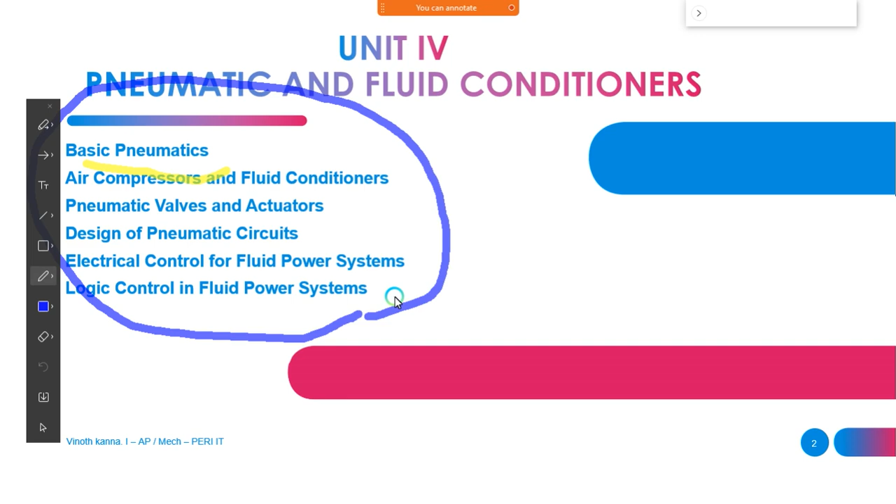In this, what are the important topics in unit number 4? These are all the important topics. The very first one, properties of air, which is an important one. The next one is perfect gas laws, followed by compressor, FRL unit, muffler. Next is air control valves, quick exhaust valves, and pneumatic actuator.

The cascade method is very important. Already we discussed this in other contexts, but even here we are going to discuss some important topics. Followed by the cascade method, we have fluidics, and finally ladder diagram and pneumatic logic circuits, which include AND, OR, NAND and NOR gates.

So wherever I'm putting an underline, like properties of air, perfect gas laws, and fluidics - these three chapters have the maximum possibility of being asked, about 2 marks questions, not more than that. So if you want to prepare for 2 marks questions, just concentrate on properties of air, perfect gas laws and fluidics.

Properties of air - already we studied properties of hydraulics and hydraulic fluids. The same properties will come here but with little changes. For perfect gas laws, we also discussed this in hydraulics, with applicable small changes we go with pneumatics. And finally we go with fluidics.

Fluidics is also one of the important topics in Part A. The rest of the topics are Part B questions. The cascade method is very essential - they will ask it for Part C also.

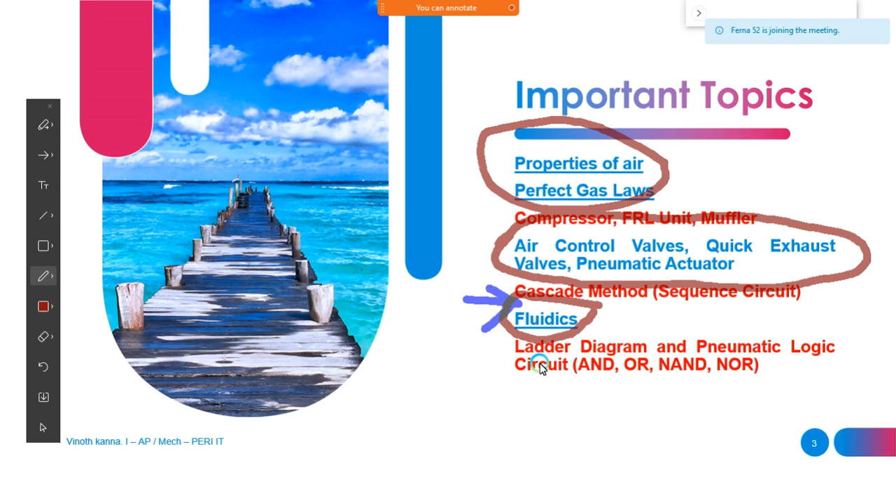So now what we are going to concentrate on now is compressor, FRL, muffler, and the cascade method. This is very important in terms of Part B as well as Part C. And finally we are going to discuss ladder diagrams and pneumatic logic circuits. So one by one we are going to see it from the exam point of view.

The maximum possible question is about the composition of air, which we already know from lower classes. Air consists of 78% nitrogen, 21% oxygen, and 1% other gases. This question has come up 2 or 3 times in the previous 5 years' papers, so remember 78% nitrogen.

In normal air, nitrogen is present in enormous quantity, and oxygen around 21%, which is more essential for our health. Finally we get some other gases including helium, neon, and maybe water vapor. So all these gases are available.

These are the two important questions in properties of air. Followed by pressure relationship, one question will definitely come from this. You have to remember: absolute pressure is equal to gauge pressure plus atmospheric pressure. This is very important, not just for the exam, but if you go for any government exam, they will definitely ask this question.

Atmospheric pressure is nothing but the air surrounding our body, the normal pressure available at Earth's surface. The standard atmospheric pressure value is 1.013 bar. So absolute pressure is the addition of gauge pressure plus atmospheric pressure.

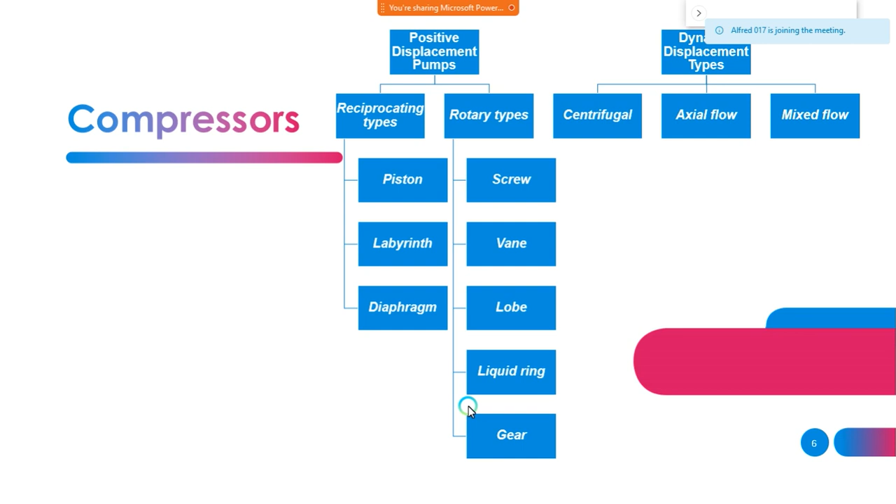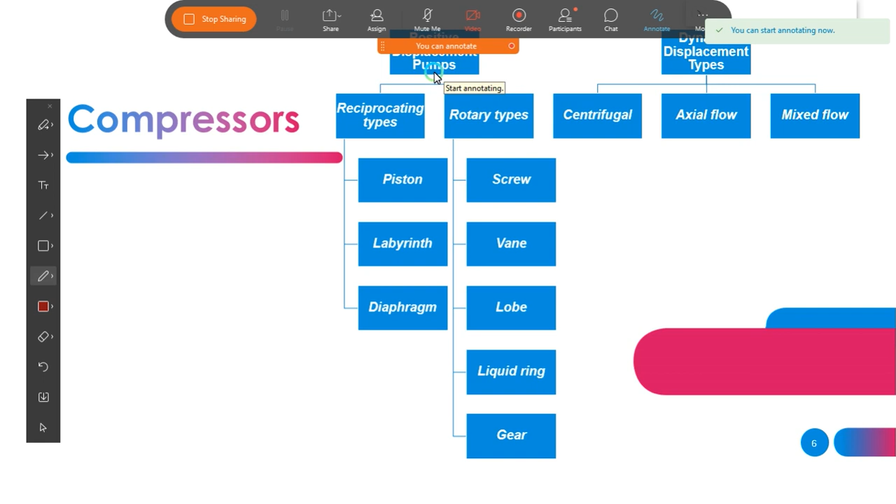For compressors, don't worry, we have n number of types. Don't worry about that. In the chapter, under positive displacement, we have reciprocating and rotary, two types. In reciprocating we have only the piston compressor, whereas in rotary type we have only two, that is screw compressor and vane compressor, not more than that.

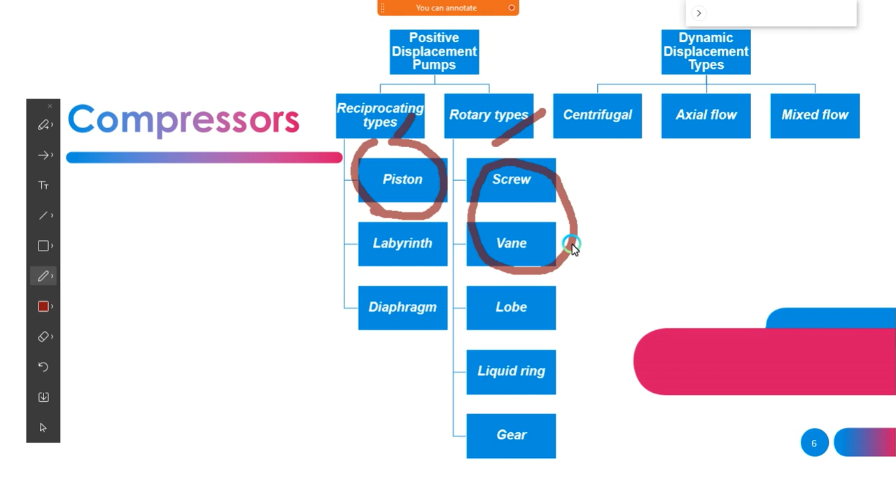In the examination, first you have to write what is a compressor. Atmospheric air is sucked by the compressor, which is used to increase the pressure and temperature level at the output of the compressor. Then you have to explain which type it comes under. For example, if they ask to explain the concept of piston compressor, first write what is a compressor, what is a positive displacement compressor, then reciprocating compressor, in which you explain the piston compressor.

In our syllabus we have only these three. In the compressor they will ask only piston compressor, screw compressor, vane compressor. Out of this, definitely one question will come, but it is not compulsory. In the 4th unit, compressor is a possible Part B question. Suppose in unit number 2 they ask screw pump or vane pump, then definitely they won't ask screw or vane compressor in the 4th unit.

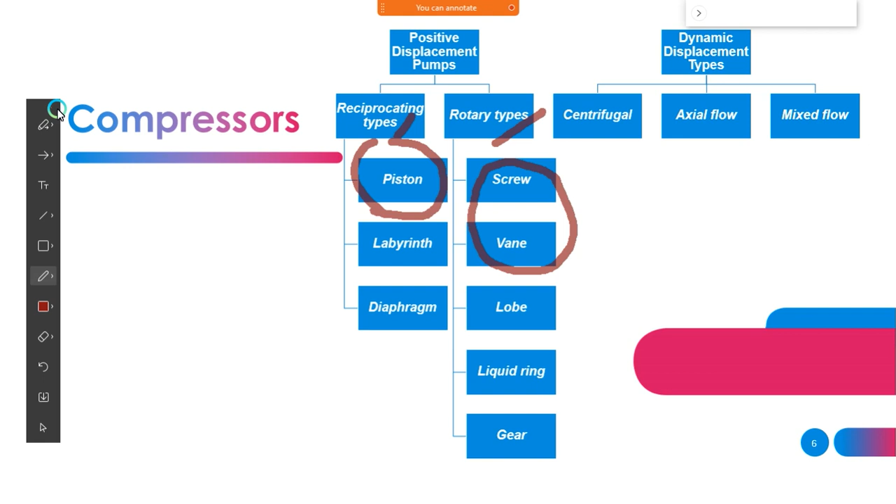So even to study the compressor, just replace it; the diagram and everything is similar to unit number 2. So better go with that, it is quite easy. This is one of the important topics in the 4th unit. Next, you should compulsorily study the FRL unit and muffler. This is very essential. They may not ask 13 marks; they will ask a 6 or 7 marks question.

The FRL unit you know well: filter, regulator, and lubricator. You know the function of the filter, the regulator, and the lubricator. We have some diagrams. We have already studied this in the classroom, and some assignments were submitted also. So study what is the FRL unit, its construction, and the neat diagram. Followed by that we have the muffler.

The muffler is a very essential part of unit number 4. Even though it looks similar to the pump, the muffler is somewhat different. What you study new here is the FRL unit and muffler, so study them first while preparing unit number 4. The muffler and FRL unit both have diagrams. As I said, draw the diagram on a single page neatly using scale and pencil. It is easy to get good marks that way.

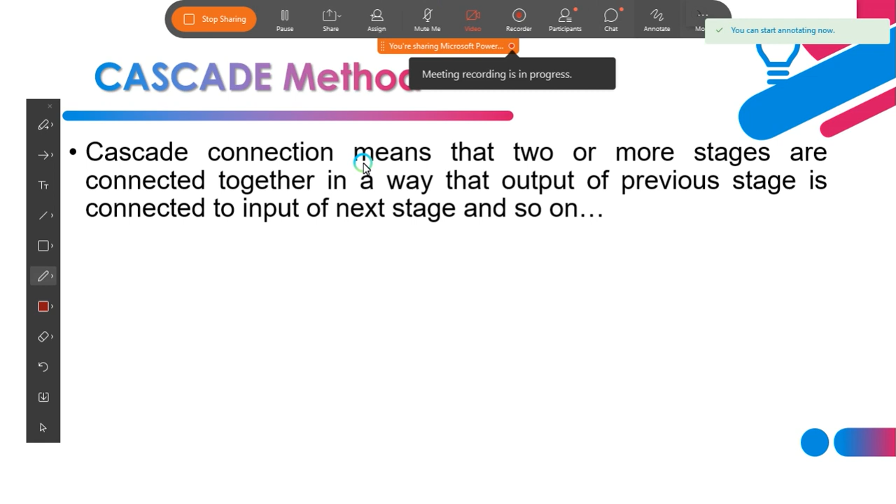Another one from either the fourth unit or fifth unit, because only these two units are application oriented. Suppose they ask from the fourth unit, then definitely the question is from cascade method. So cascade method is very important. We already discussed what cascade method is, so here I am going to recall it for you. So what is cascade method?

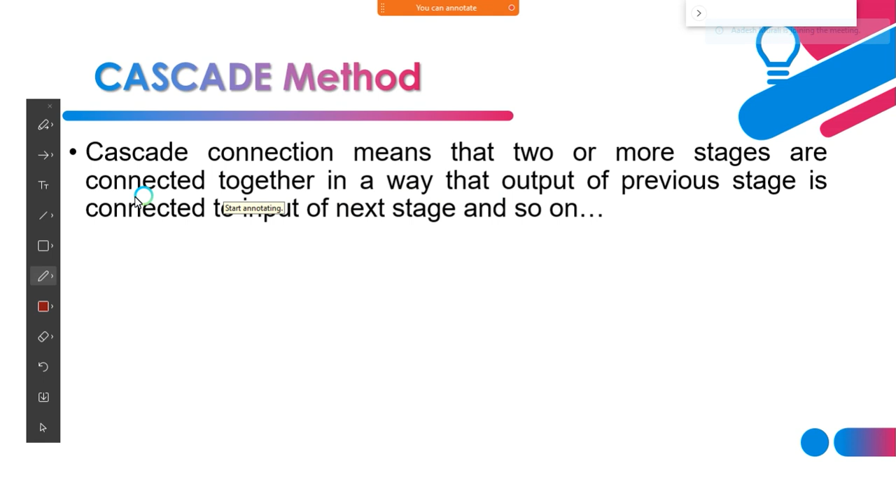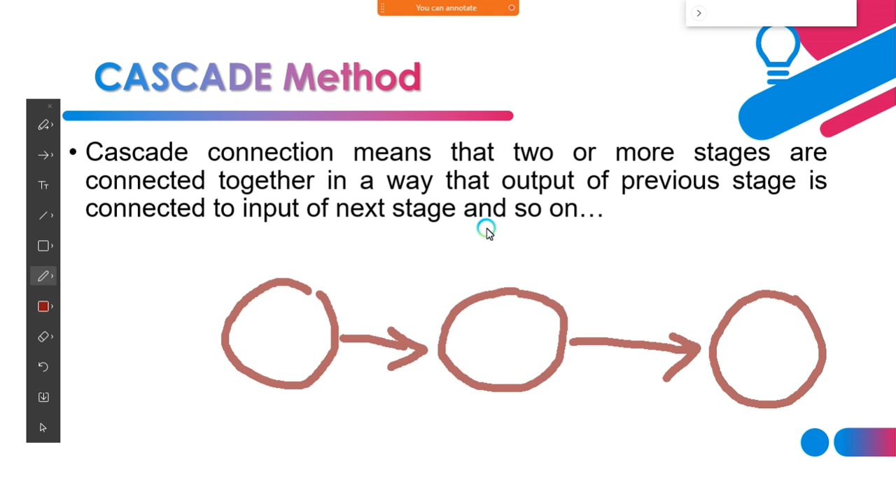The definition: two or more stages are connected together in a way that the output of a previous stage is connected to the input of the next stage. So you develop a system as a combination of groups. Say 3 groups will be there. Output of the first group will be the input of the second group, and the output of the second group will be the input of the third group. Such a system is called a cascade system: two or more stages combined together in order to get the proper output.

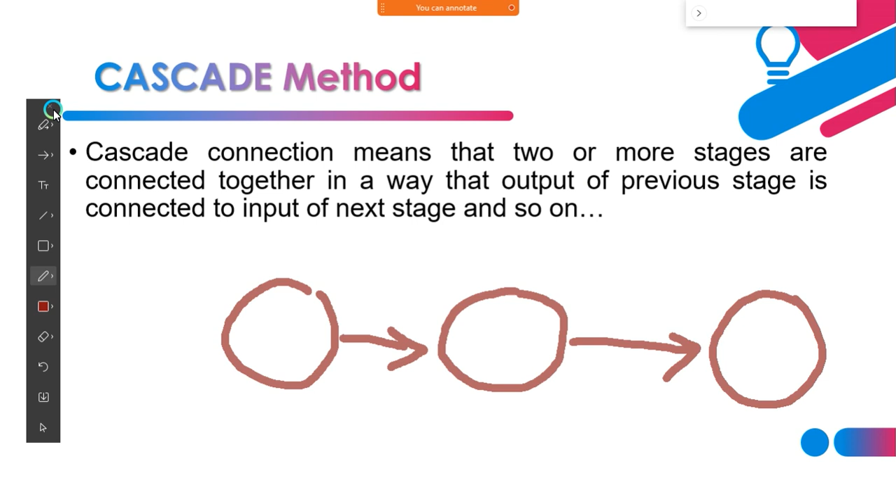So now we go with the procedure. They will give a design question; you have to design the entire circuit. Here we have only 5 steps. If you know these 5 steps, it will be very easy. No need to go to the textbook, just follow what I am telling. The very first step: you have to put a name for each cylinder.

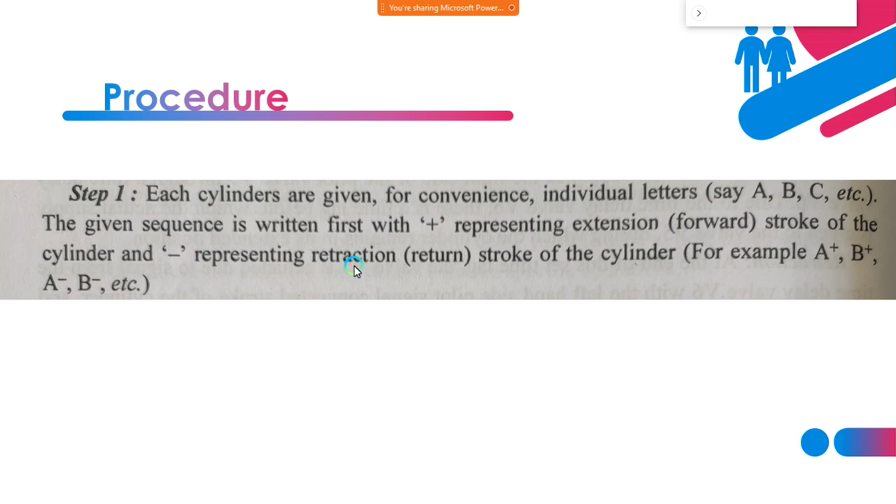For example, if the system includes 3 cylinders, then you have to name them A, B, C. The alphabetic letters A, B, C denote the cylinder names; each letter stands for a cylinder. Then we put an extra positive or negative sign. The positive sign indicates the forward stroke, the negative sign indicates the return stroke. So in the first step we define the name of each cylinder and its position, either forward stroke or return stroke.

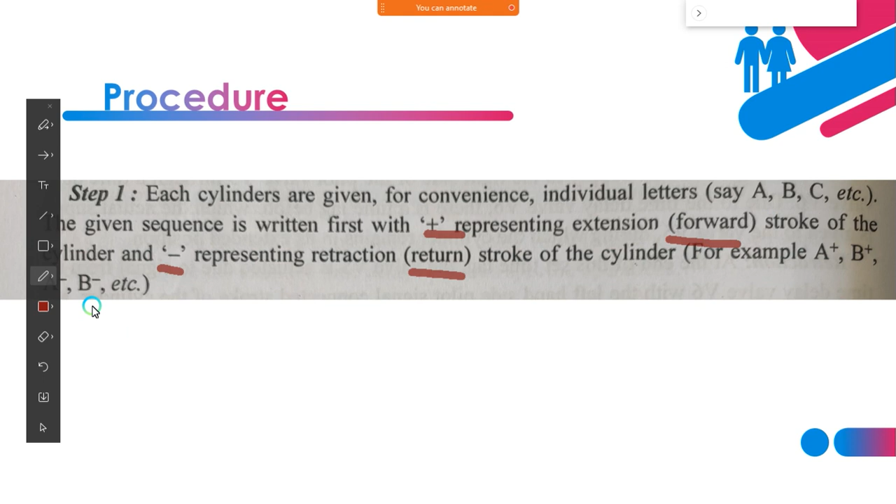But the question itself will give step 1. The question contains the first step, like A positive, B positive, A minus, B minus. So no need to worry about the first step. Then we go straight to the second step. After reading the question, you have to do the grouping yourself. Once you do the grouping correctly, the answer will be correct. So how will you group?

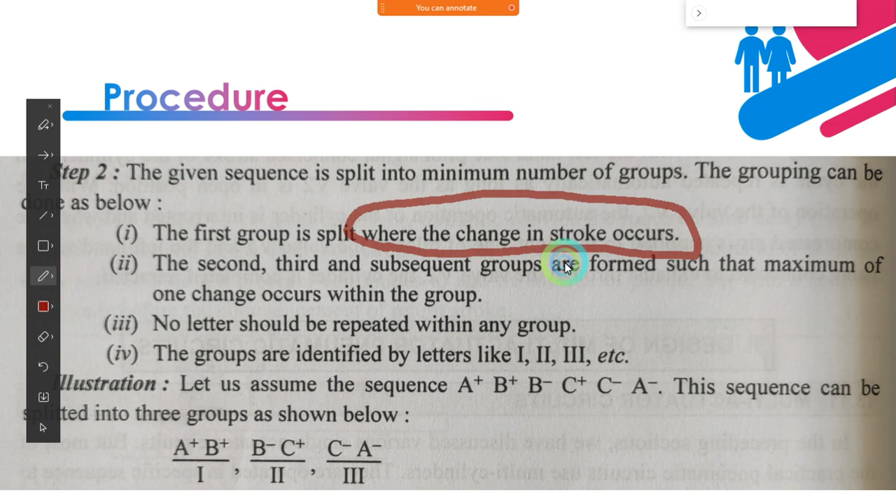Very first, you group where the changes in strokes occur. The first group will be where exactly the changes occur. Second, third and subsequent groups will have a maximum of one change, not 2 or 3 changes. Maximum one change, minimum one change, which means each group must contain at least one change. That is essential. The first group may have any number of changes, while subsequent groups have a maximum of one change, either forward stroke or reverse stroke.

If that is called changes, you need to go for changes. And then in the group itself, no letters should be repeated. For example, if you take ABC as a cylinder, in which already you put A positive in one group, B positive in the same group, you should not repeat again the term A or B. So I have a group like A positive and B positive. This is one group I have.

So if I think, okay, why can't I put A minus here? The letters are repeating, so you should not add it in the same group. It will come as a separate group. That is the meaning of it. So no letters should be repeated. And the fourth and final condition: the groups are identified by Roman numerals like 1, 2, 3. So for example, here we have group 1, 2, 3. So 3 groups we have.

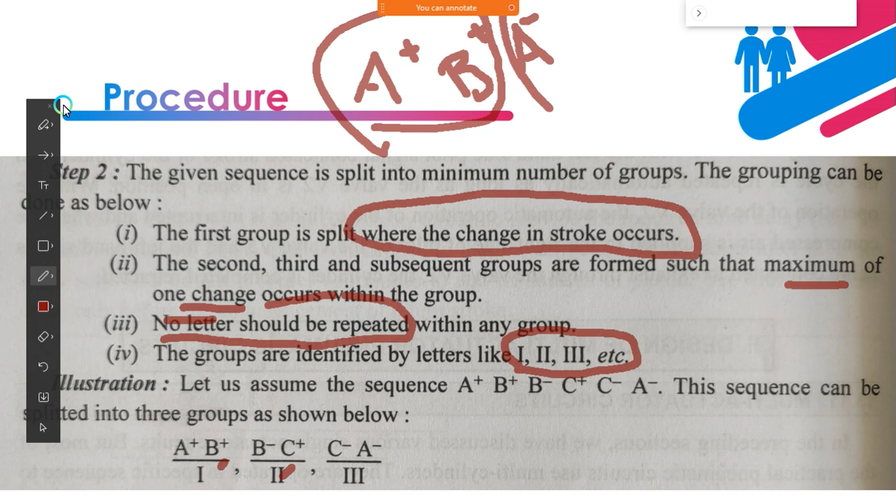So for each group, we may take the first group as A plus, B plus. You may add C plus or C minus, no issue, but you should not add a value containing A or B, because already we have A and B in group 1. So you should not add A negative here. So A positive, B positive, then C minus or C plus is quite good. But you should not repeat a letter which is already present. So this is the grouping. Grouping is very essential. Once you've done the grouping, the problem will be very easy.

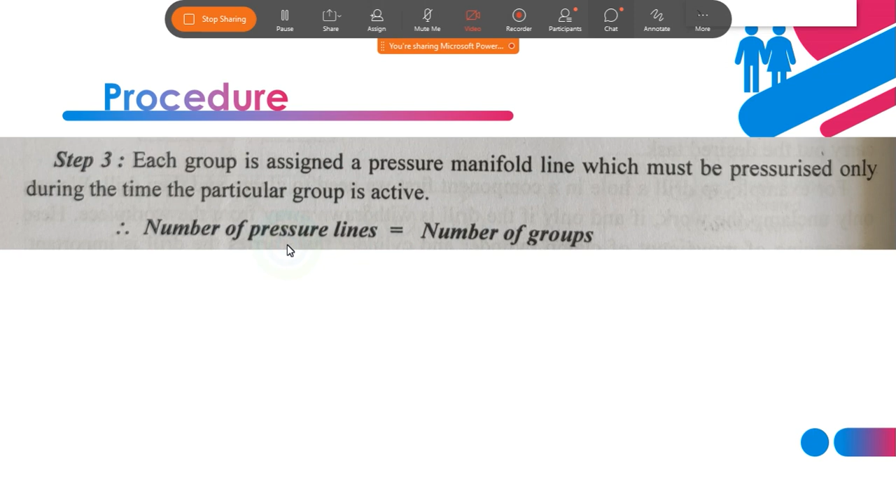The third step is you have to go with the supply lines. Here they indicate pressure lines, which are nothing but supply lines. We need a supply for each cylinder. Either pneumatic or hydraulic, we are going to supply the fluids in order to actuate the cylinder, for which we need a supply line. How will you identify the supply? However many groups we have, the same number of supply lines we have.

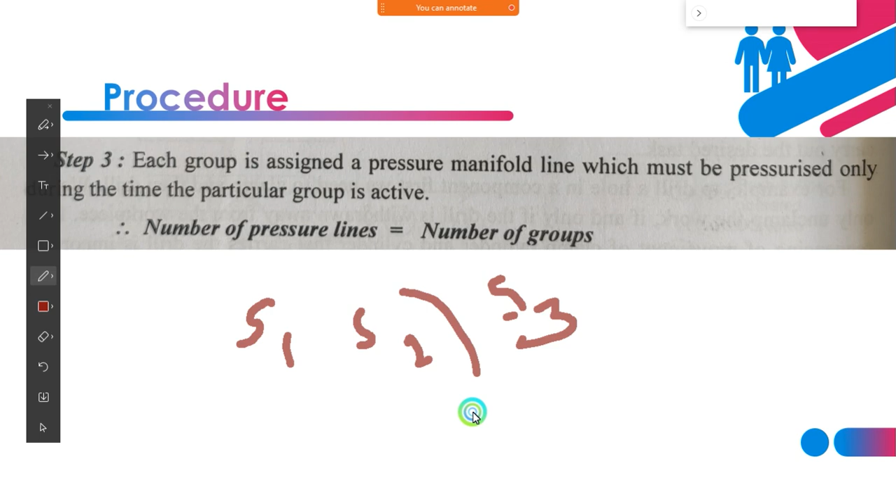Suppose we have 3 groups, we go with 3 supply lines. So simply we make it S1, S2, S3. S1 indicates supply line 1, S2 supply line 2 and S3 supply line 3. So if you have 3 groups, then you go with 3 supply lines. 2 groups, then you go with 2 supply lines. Okay, then go with step 4.

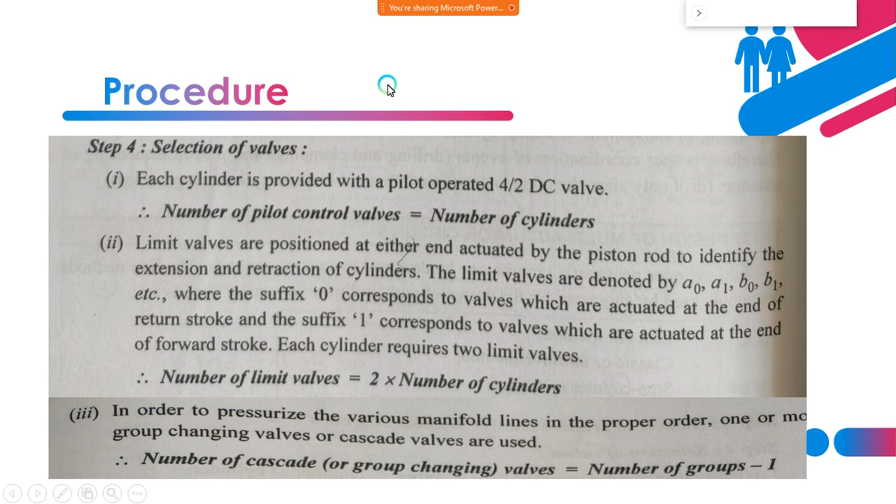In step 4 you have to go with the valves. Each cylinder has one valve. So the number of pilot control valves, the direction control valves, is equal to the number of cylinders. However many cylinders we have, the same number of direction control valves we need. And we have the limit switches.

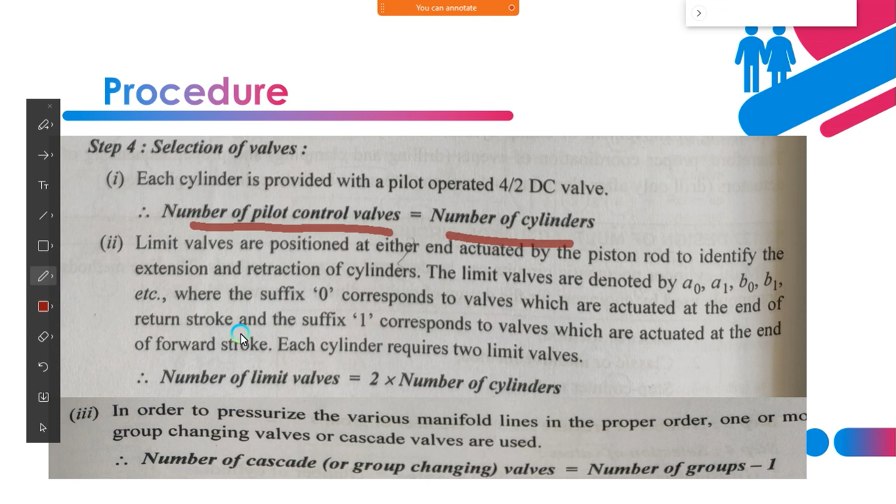The limit switch tells whether the piston is reaching the forward stroke extreme position or the reverse stroke extreme position. For the forward stroke we have one limit switch, for the reverse stroke we have another limit switch. So each cylinder has 2 limit switches. The number of limit switches is equal to 2 times the number of cylinders. Suppose we go with 2 cylinders, A and B, we need 4 limit switches. If you have 3 cylinders, then 6 limit switches. Like this you go with designing.

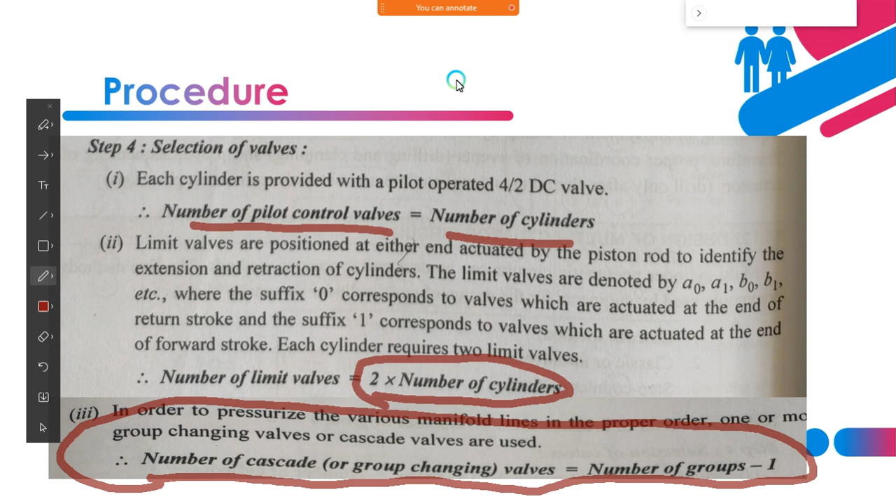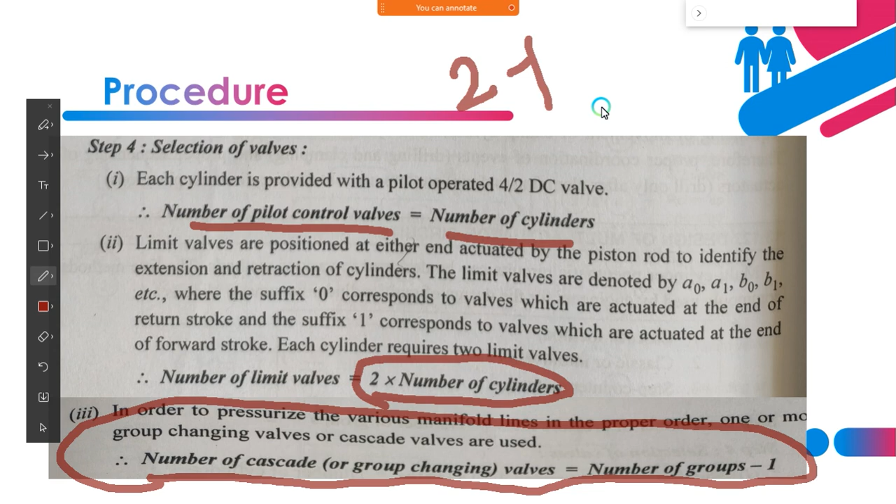And finally we have the cascade valve. These are very important. How do we define the cascade valve? The number of cascade valves is the number of groups minus 1. Suppose I have 2 groups, I need to control the entire system by 1 cascade valve, because 2 minus 1 gives 1. Suppose we have 3 groups, we go with 2 cascade valves to control the overall system. So this is step number 4. And the final steps. Already I told you what a cascade valve is.

Cascade system, which means that output of the first system will be the second system input, then the second system output will be the third system input. So the grouping we are going to do. So in the first group, for example, you may consider I have cylinders A and B. So A cylinder output will connect to the B cylinder. Okay, this is what I mean in group 1.

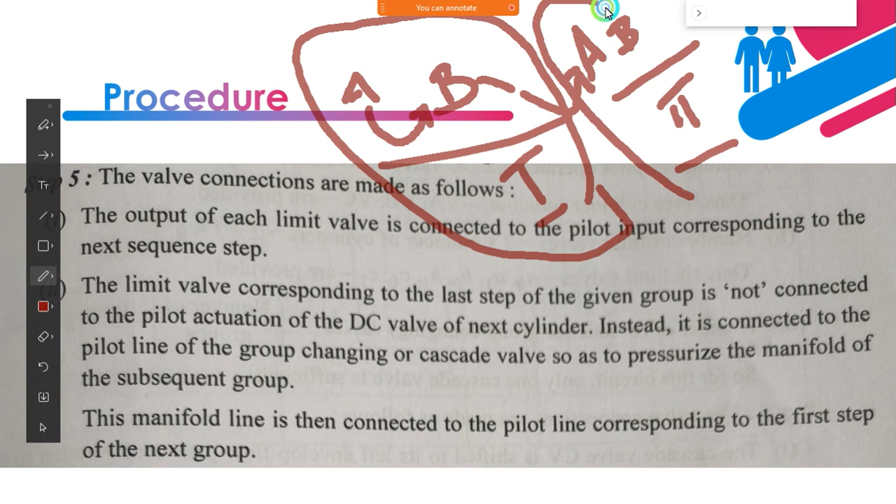Suppose after group 1 I have group 2, A minus and B minus. Now after B plus, the B output should not connect directly to A. Why? Because the first group is over, then the second group will start. So in order to activate the second group, we need to connect the output of B into the cascade valve. Then the cascade valve is connected to the next group inlet.

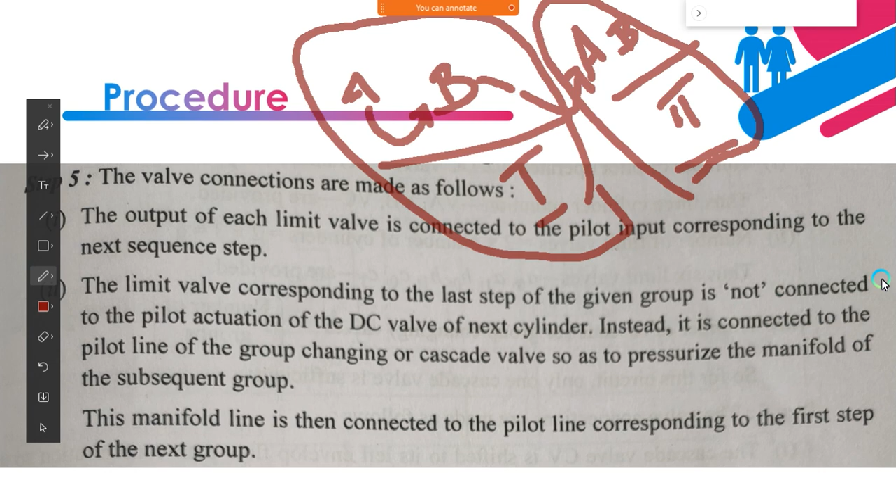So within the group, the output will be connected to the next system, whereas outside of the group, you need to connect each system output to the cascade valve in order to control the entire system. So these were a total of 5 steps. If you know these 5 steps, then you go with the easy design.

Okay, so now finally I will go with one example, then you come to know how they design everything. So here we have a system A plus B plus A minus B minus hydraulic circuit. The question says design the hydraulic circuit by using the cascade method. The system will be A plus B plus A minus B minus.

So by seeing here, we have two alphabets, A and B. Plus plus minus minus, just omit it. Just consider only the alphabets. We have A and B, so we have two cylinders. Each alphabet stands for a cylinder. So here we have two cylinders, that you have to remember.

So first, you have to form a group. As I said, each group should contain at least one change. At the same time, the letter should not repeat. So here I am taking A plus B plus as one group, and A minus B minus as one group. You may take A plus B minus, B plus A minus, that is also possible. So in my case, I take A plus B plus as one group and A minus B minus as one group. So the very first step, you need to form the grouping.

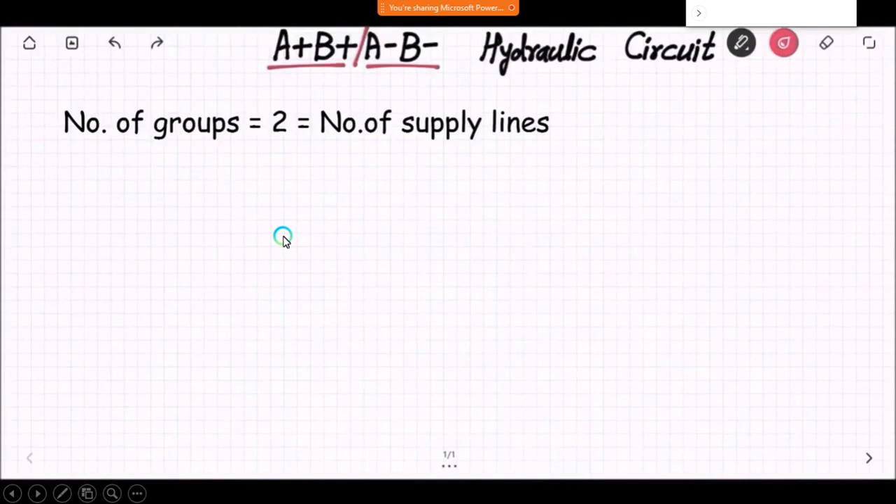Next, the number of groups is equal to 2. So we need two supply lines, S1 and S2, in order to supply hydraulics to each of the cylinders. So I just draw S1, S2 at the very bottom of the page. We have two groups, so we need two supply lines.

Next, we need the control cascade valve. As I said, the number of cascade valves is the number of groups minus 1. So here we have two groups, 2 minus 1 is 1, so 1 cascade valve is enough. The cascade valve is simply a 4/2 DC valve only. So just draw the 4/2 DC valve.

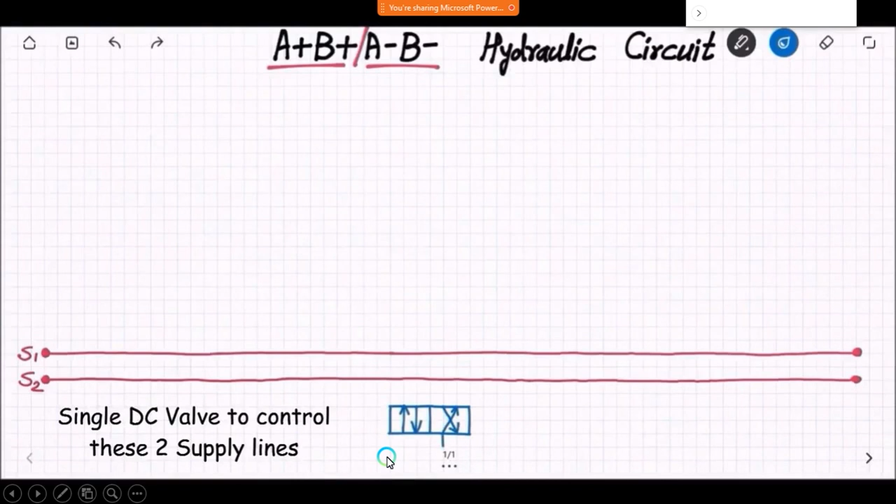Here below the supply lines you have to draw this; this is called a cascade valve. Always you have to connect the second line with the supply system. For all the questions you have to follow the same; the textbook somewhat differs. You just follow this method, this is quite easy.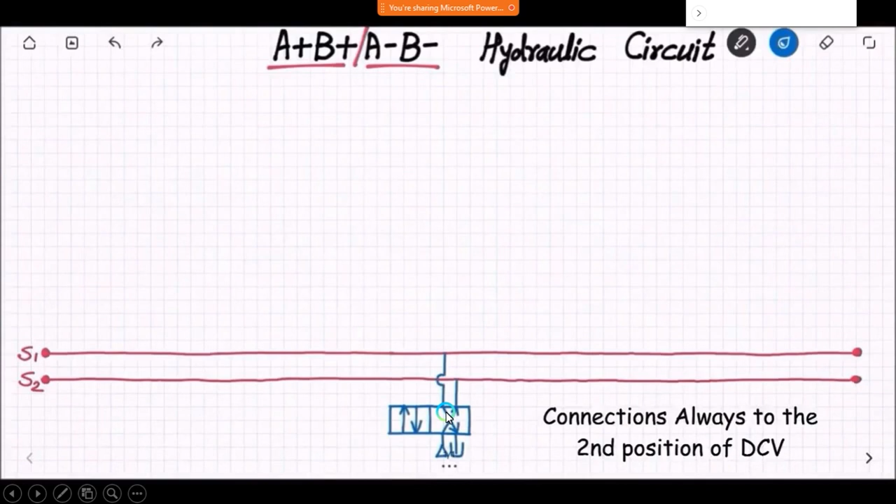So now we have cylinders A and B. So first draw the two cylinders, A and B. Then you have to draw the position of the piston. How will you draw it? See, first we have A plus B plus. If they are giving A plus, you need to draw the piston position as minus. B plus, you have to draw minus.

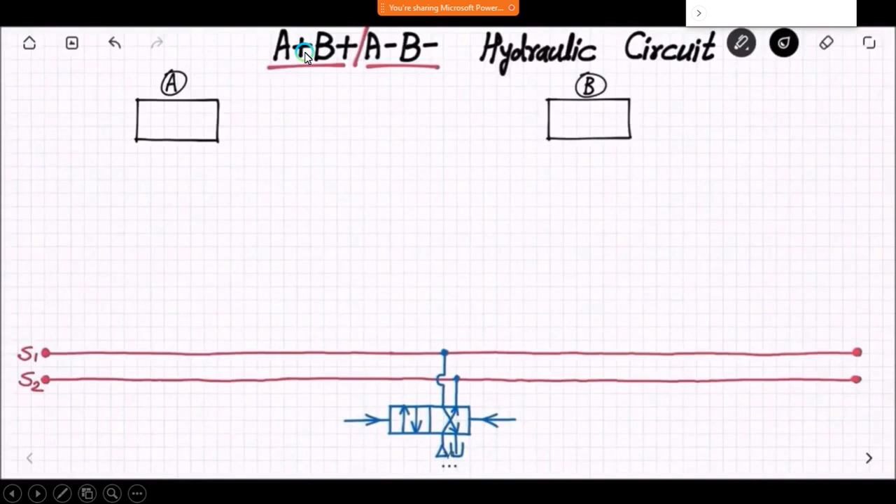Suppose they are giving A minus, you have to draw the piston position as plus. So here I draw the initial position at the minus location, because it is the reverse stroke extreme position, this is minus.

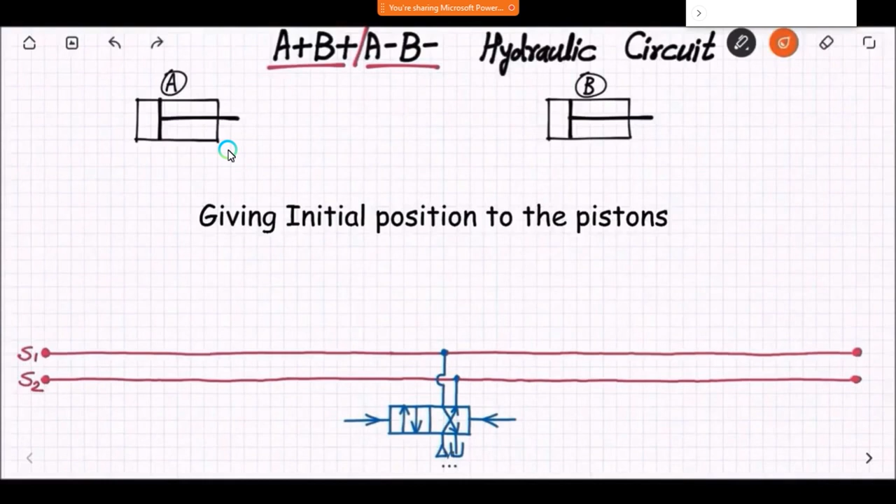Here also minus, because we have the first group as A plus B plus, that's why I draw minus minus. Okay, so now for each cylinder we require a direction control valve, that is a pilot valve. So one cylinder, one valve; two cylinders, two valves. At the same time, you need to mention the limit switches. So here I have L1, L2, L3, L4. L1 stands for A cylinder retraction stroke, L2 stands for A cylinder forward stroke, whereas B cylinder forward stroke is L4 and reverse stroke will be L3.

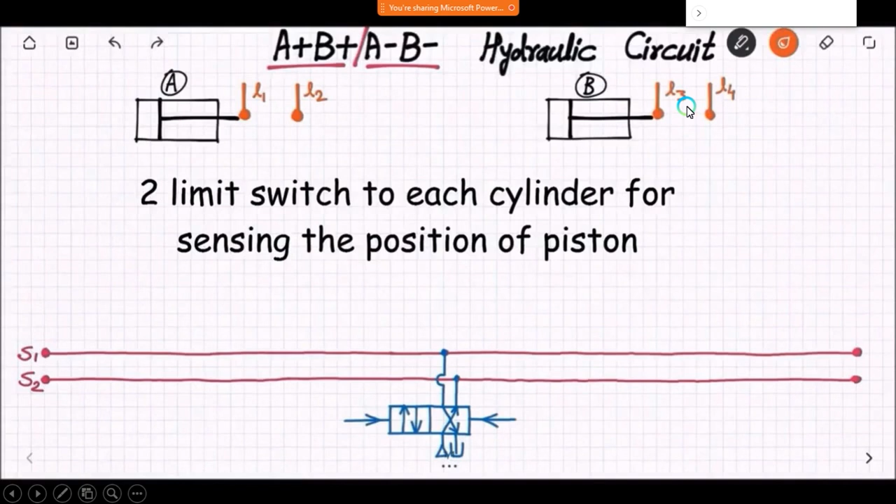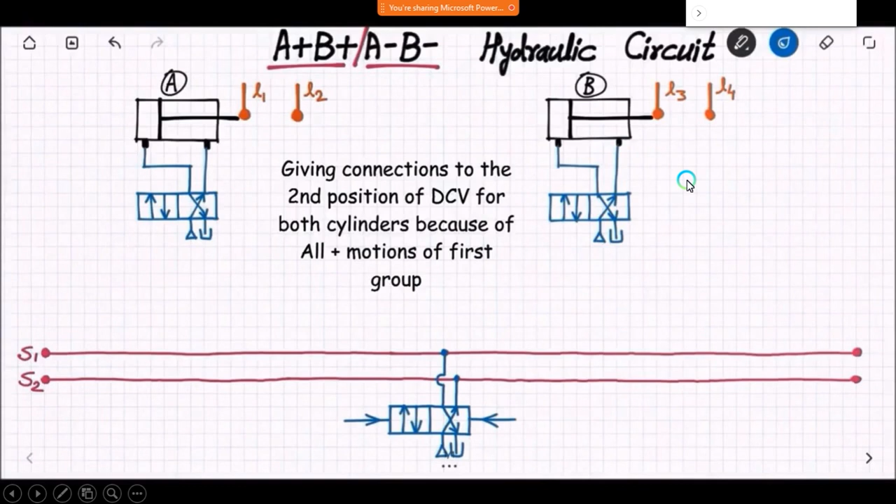Then you go with the direction control valve. For each cylinder I draw one direction control valve. The same second position you have to connect with the A and B cylinders. Okay, so now we go with the connection. You have to supply the lines. S1 you have to connect with A plus, because we need the A plus motion first. So connect A plus. Now the flow starts from this end to here, and the piston keeps moving from the left end to the right end.

At the end of the stroke, it will hit the L2 position. After hitting L2, limit switch 2 energizes. Limit switch 2 you have to connect with the same S1 line, that is with B plus. Now the same operation happens, and the piston reaches L4. So now group 1 is over. You should not connect it to A minus; since the group is over, you need to connect L4 into the cascade valve. I connect it. So now the first group is over.

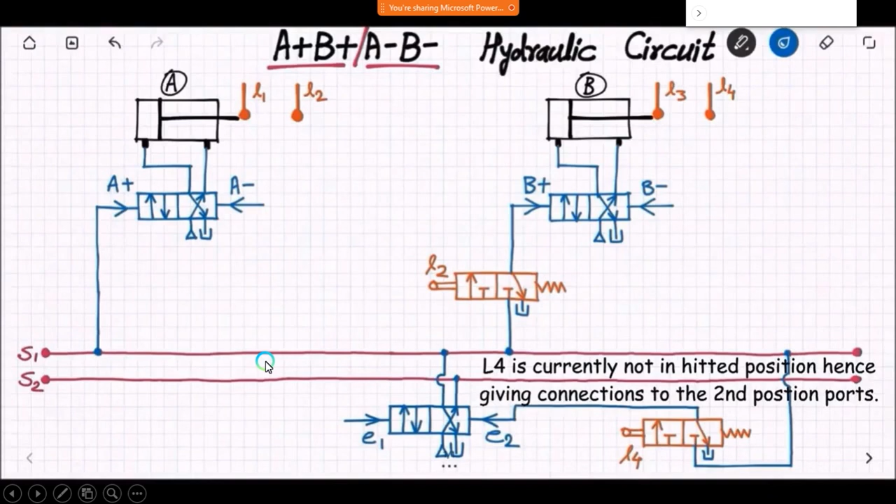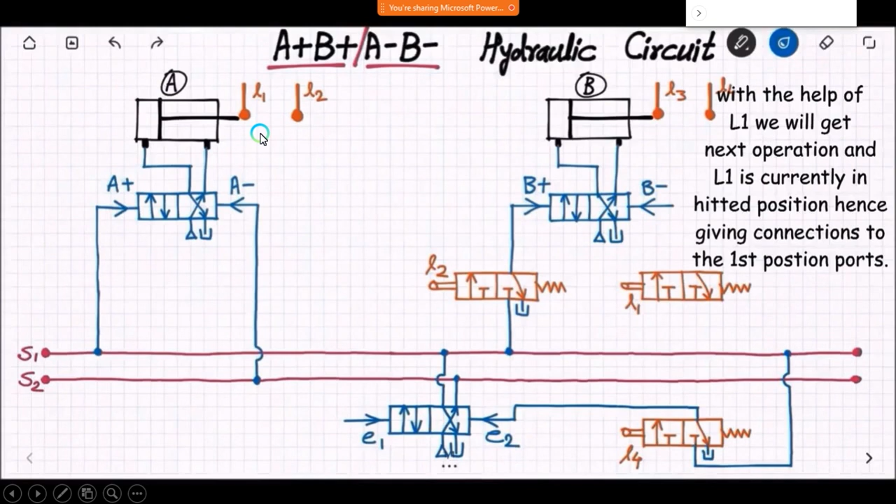Now what to do? The second line will connect to A minus. I connected it. So now the piston returns back, from L2 to L1. Once it hits L1, L1 gets energized. Now L1 connects to the B minus stage, so B minus will move. L3 will hit, and L3 is connected with the cascade valve. This system will rotate. So this is the concept of developing the hydraulic circuit in the cascade method.

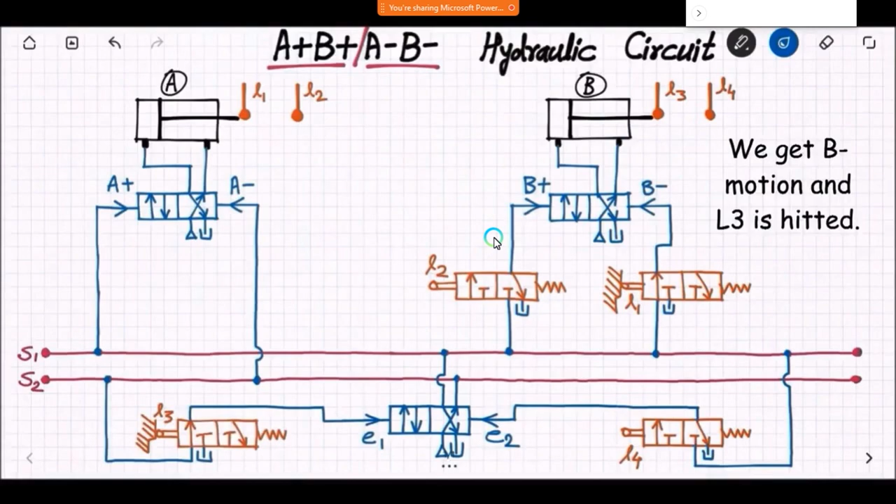Hope you understand how to design. This is an important question they'll ask in all examinations. Likewise we have n number of examples. After finishing this, I'll share some assignment questions with you; you have to practice and submit to me. So what is the next question they'll ask in this unit? That is the ladder diagram and pneumatic logic circuit. We already discussed pneumatic logic circuits: AND, OR, NAND and NOR. Regarding this, I'll give you the assignment; prepare it and submit to me.

So the cascade method is very essential. In this unit, what we discussed so far: Part A questions, properties of air, perfect gas laws and fluidics. Part B, we discussed the compressor, FRL unit, muffler, air control valves, quick exhaust valves and pneumatic actuators. We discussed the cascade method, ladder diagram and logic circuit. Part C questions will also come, that is the cascade method. So for the examination, you should study the cascade method first. It is very essential.

Followed by that, go with the compressor, FRL and muffler. Then go with the pneumatic logic circuit. This is a rare question; they will ask a 4 mark or 5 mark question if they ask from this chapter. Normally they will ask from this portion: cascade method, compressor, FRL and muffler. The compressor looks the same as a pump. FRL and muffler we also discussed. These are the important topics in unit number 4. Hope you understand. Is there any doubt? You may ask now.